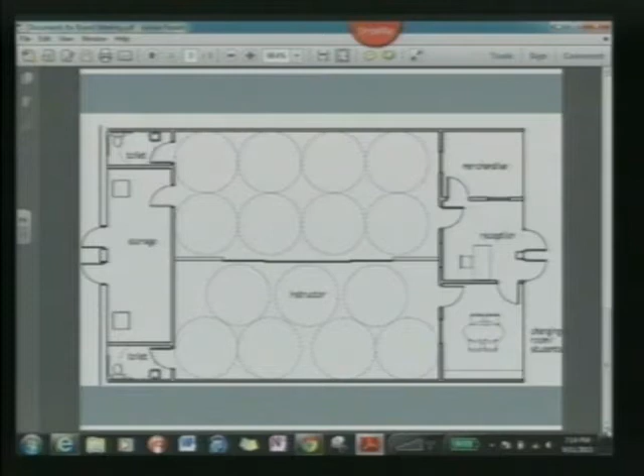We really feel that owning a business comes with a great responsibility to give back to the community. As a result, we're starting our own charity, called Giving Goddess, to support local women and children. We intend to have a once-a-month Giving Goddess open house on a Friday night, and all the proceeds from that will go to a local charity.

Women will be able to come to the studio for 2 hours and bring a friend to attend our specialty fitness classes. We'll then partner with a local business for an informal after event. We're very excited to establish and grow our relationship with other local businesses so we can all support one another. We also plan to join the Chamber of Commerce and participate in local festivals and events. Further, we'll be offering discounts on our classes to college students, teachers, military personnel, nurses, and seniors.

So in closing, we hope we've provided you with some insight into our business plan. We are genuinely, thoroughly excited to open our business in Westmont and would be honored to establish a long-term successful relationship with the village. We'd be happy to answer any questions you may have, and respectfully request your approval of our special use permit.

Okay, thank you very much.

Is there anybody from the public who wishes to comment either for or against this special use? Seeing and hearing no comments, we'll close the public comment.

Staff: This space is a former dance studio, and it should be a unique new addition to the shopping center. It will attract visitors to Westmont for classes and will fill a current vacancy, and we have no other concerns. And the parking is more than adequate? Correct. Thank you very much.

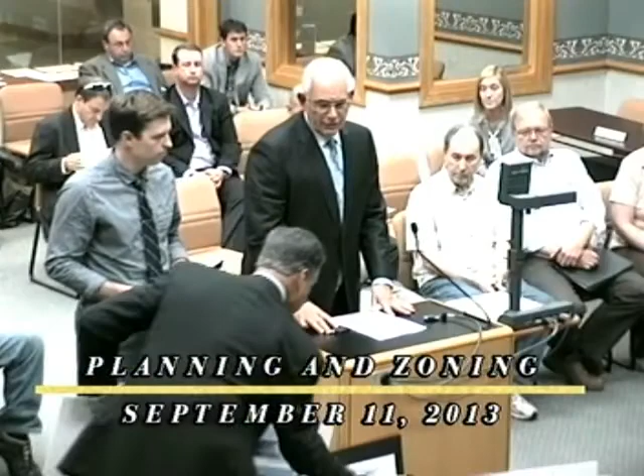Good evening, Mr. Chairman, members of the Planning and Zoning Commission. I'm Steve Pagnotta from the Bradford Companies. I'm going to coordinate our presentation tonight. We have a series of professionals that are going to address a variety of different development issues. Bradford's a 25-year-old company. It's developed about 60 projects, primarily in the Chicagoland marketplace, about 10 million square feet.

And if approved by the village, this would be our 7th Mariano's that we would be developing in Chicago. We've completed 4 Mariano stores in Chicago, first one in Vernon Hills. We opened one in Palatine, Harwood Heights, Illinois, and Frankfort. In addition, we have 2 under construction, one not too far from here in Wheaton and one in Lake Zurich.

So just to give you a feel for the store, we have a representative from Mariano's here tonight, who could also address the concept and what Mariano's is about. But I thought we'd start with our civil engineer to address our preliminary plat as well as the site plan, and then we'll move into landscape architecture, then building architecture, and then probably open it up to questions. Drew?

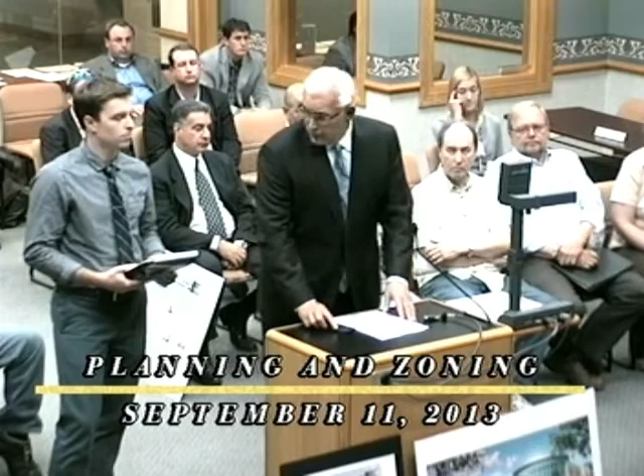Good evening. My name is Drew Walker with Kimley Horn. We're the civil engineering consultant on the project. This is the projector.

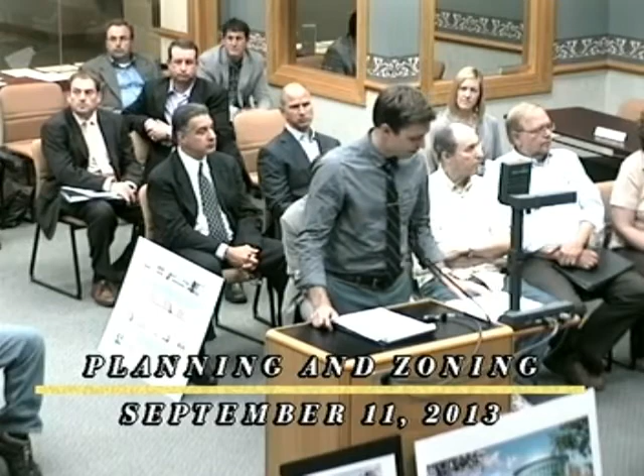Just to start out here, this is the plat of subdivision. I'll show you that the property will be split into 2 lots. You'll have an access easement to serve Lot 2 on the south here. We also have an underground detention easement. It's pretty straightforward. Look on the site plan here.

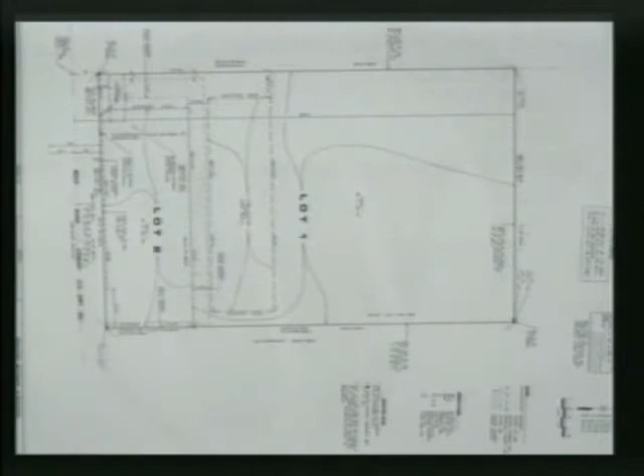Site plan. So we have an approximately 71,000 square foot grocery store on a 9.5 acre site. There's 542 parking spaces. Give you an idea of the site circulation. I have this angled so you can see it. North is in this direction here.

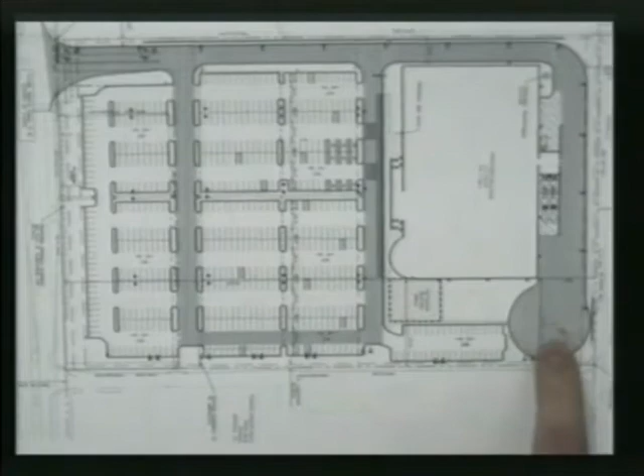So 63rd Street bounds the property on the south. We've got internal circulation. We've tried to separate your truck traffic, which will go behind the store and has a truck turnaround in the rear here, so that it doesn't have to intermingle with the pedestrian and vehicular traffic, located just south of the grocery. 2 main parking fields, and additionally we have pedestrian access all the way to the right-of-way of 63rd Street through a nice landscaped median here.

Moving on to, do you have the grading exhibit? I brought that as well, just to give you guys an idea of what's going on.

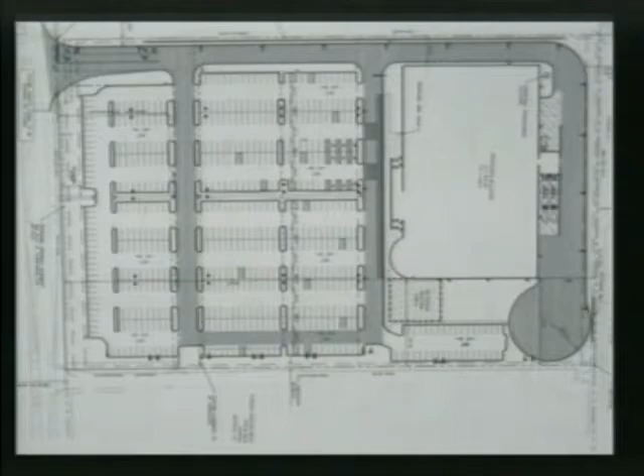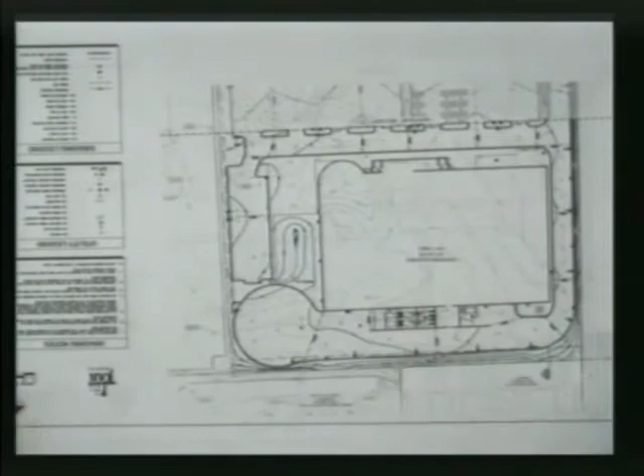Basically, we'll be trying to send as much drainage to bioswales located here at the south of the site and in some landscape areas, before the stormwater makes its way to the bioswale in this area, and then to an underground storage facility that would meet the town's detention requirements.

And then lastly, your utilities. The site is being served by an existing water service along the eastern boundary, and additionally there's the existing sewer service here that would serve the property. Stormwater would be managed through an underground detention facility located under the main parking field here.

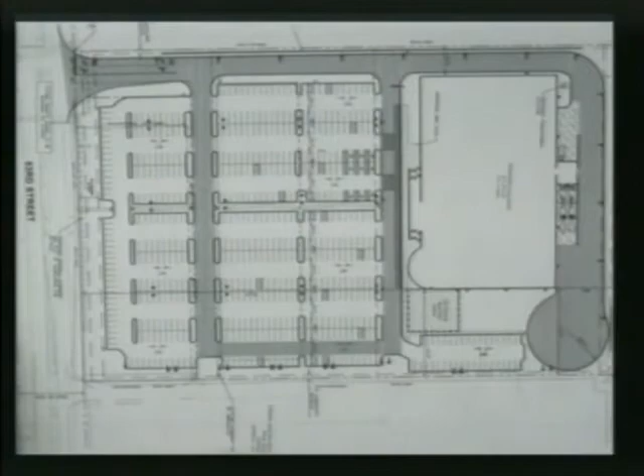Our next presentation is on landscaping. Ellen, do you have the exhibit?

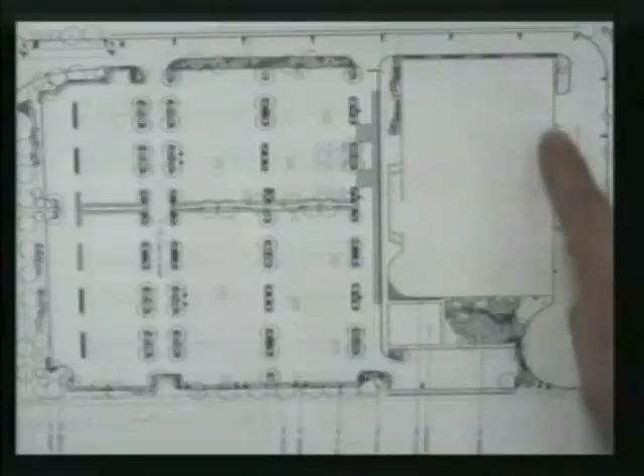Hi, my name is Ellen Schmidt. I'm with the Lakota Group, the landscape architects on this project. We have provided foundation plantings along the facility and the facade as well. Along with foundation plantings, we are meeting the parking lot tree requirements, planting trees within the islands and the interior, as well as providing parking lot screening around the exterior, including the southern side, which will be more heavily screened with a large berm and some evergreen trees. And along the roadway we are providing the required parkway trees.

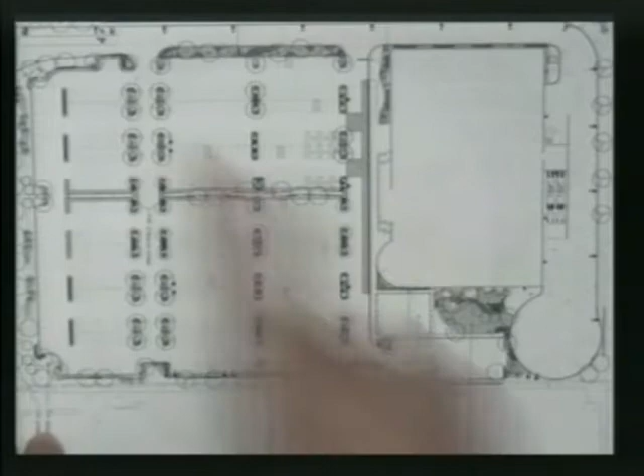As was mentioned in the civil plans, we're providing a bioswale here, which will be planted heavily with native vegetation. The existing site has quite a few trees on it now, which we are planning to remove. Many of them are poor quality, undesirable species, and our plan does meet the tree replacement requirements listed by the village, as well as the general overall open space tree planting requirements.

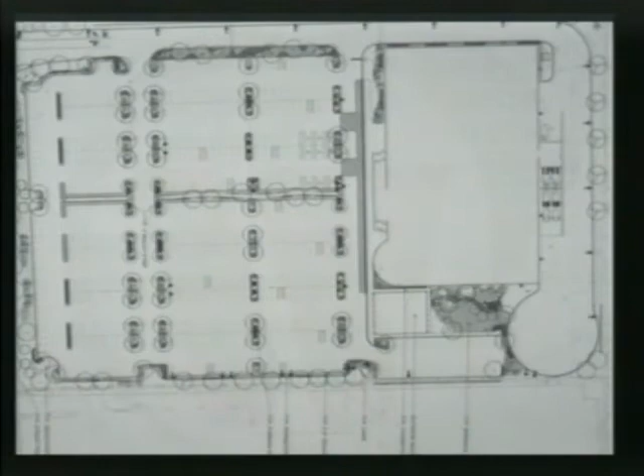Just as a close-up, we have the bioswale here, just east of the grocery store, and an outdoor seating area that is yet to be determined. This will be further developed as we move forward with the project, but it will be a nice amenity coming out of the grocery store here.

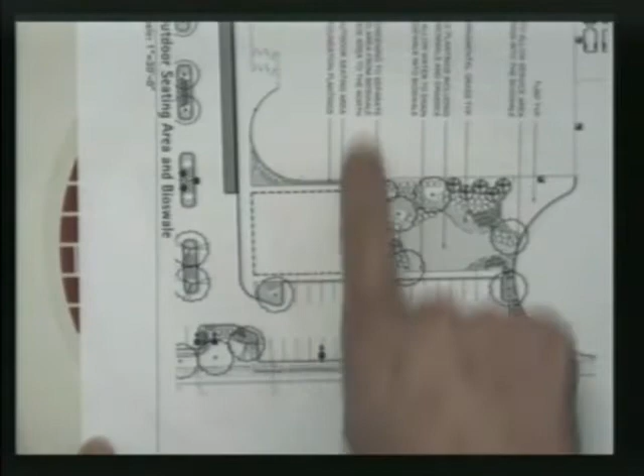Mr. Chairman, would it be appropriate, to the extent you have questions regarding civil engineering or landscaping, to bring it up now before we move on to architecture? I realize we went through some of that pretty quickly. So should we start with civil engineering and move into landscaping questions? I'll query the board members—does anybody feel you need any explanation so far as to what we've seen? No explanation, I do have a question. No, please continue with the presentation.

All right, our next presentation is by Peter Theodore. We're going to address the architecture of the building. Turn it over to you, Peter.

Good evening, my name is Peter Theodore. I'm the architect for the Marianos building. What I'd like to do for the audience is just quickly show them the rendering.

If I may interrupt, we have adequate drawings. Okay, why don't you put those up here so the audience can see them? Perfect. Thank you.

This is a pretty exciting project, exciting from many different vantage points. When you look at this building and compare it to other retail architecture, something becomes apparent immediately. When you consider retail architecture and the use of glass, it's rather limited—most retailers do not give up floor area to glass. Bob Mariano's concept of architecture, glass, and building function all relate.

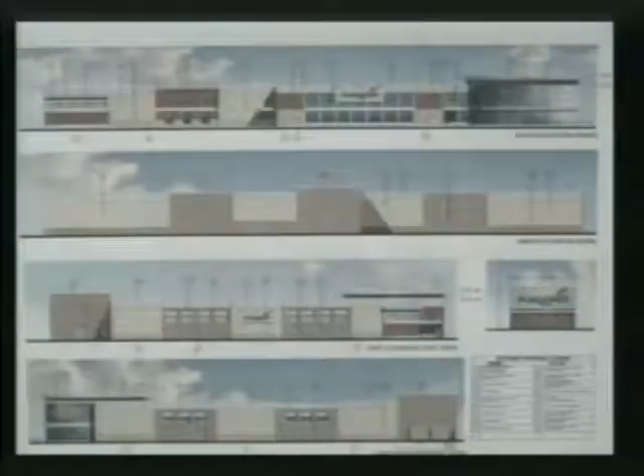So when you look at this architecture and ask yourself, what style is it? How does the building work? Everything you see from the rotunda to the center of the glass is all about the great outdoors coming in, the light and ambience spilling out, welcoming the pedestrians.

The rotunda is an extension of the landscaping, in that it has its own landscaping oasis within the store. You're actually encouraged, unlike other food stores, to sit down and sample the foods—whether it's focaccia bread, gelato, delicatessens. There's a litany of foods surrounding this area where you're encouraged to stay, mingle with friends, and socialize.

And enjoy the atmosphere. When we think of vestibules in a grocery store or any retail store, we think of a transitional space, purely utilitarian, serving a function. That's not Bob's concept. From the minute you enter into the store, the vestibule opens up into the produce aisle, so the vestibule actually becomes part of the store.

So when we look at the glass, virtually the whole front of the store is given up to glass, so that the functions behind those walls become alive and interactive. Real estate is so valuable to retailers that they don't usually give up that area, but to Bob, it's part of the whole function of the store.

So the architecture relates on a one-on-one basis, and as you travel around the building, high windows let light in above the fixtures. There's articulation on all four walls, and it's a complete masonry building. So it's four-sided architecture, everything has a reason, and it's reflective of how the store operates.

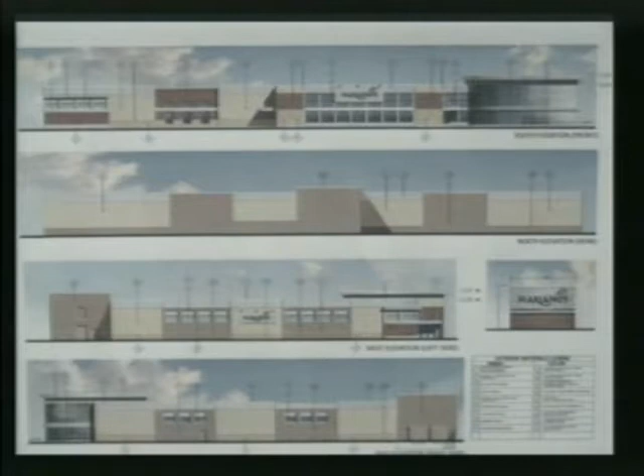With that, I will conclude my presentation, and I'm here to answer questions.

Thank you. Clarification, one thing — you said the signage on the side of the building? On the east elevation, we have it incorrectly shown on the west elevation. That's what I was going to ask you. And it will be on the east elevation. And it shows up correctly on the perspective. All right.

I do have one comment, if I may. On these drawings we've got, the 4 sheets, the engineering drawings — on the back end, we've got a street lighting, parking lot lighting drawing. It looks like your building is turned 90 degrees clockwise, so let me bring up the exhibit.

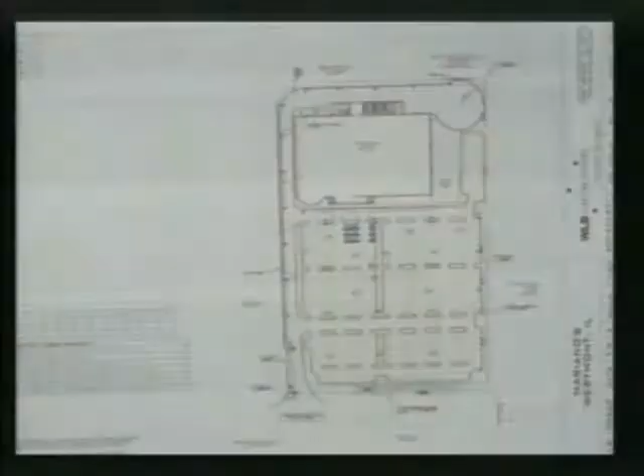North? Is it the same exhibit, Mr. Chairman, or you have something different? That's correct, no, that's the one. Okay, it looks like your glass enclosure is on the southwest corner — I mean, the north. Yeah, the lighting, in terms of where the poles are, is identical, but the building changed. That's an earlier version of the site plan. So the building is as we presented it — just disregard the location of the building in that plan, according to these engineering drawings we have. Yeah, we'll modify that accordingly.

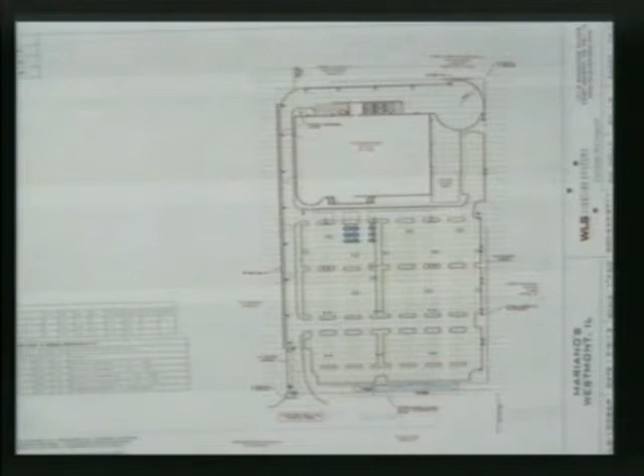Okay, no, just so we're all on the same page. I think we have another — that's the correct orientation of the building as presented. So we'll modify the lighting exhibit for our next presentation. I want you to build it in the right way. We'll try. Okay, please, go ahead.

That concludes the presentation. As I mentioned earlier, we have people available to the extent there are questions regarding the Mariano's operation — there's someone from Mariano's. If there's questions regarding any traffic, we have a consultant there, as well as civil engineering, landscaping, and then representatives from Bradford. So that concludes our presentation.

All right, fine. What I intend to do then is I will open this to the public comment, and as each person brings up their concerns for or against, then you can satisfy their concerns. Okay, will anybody speak on this issue? If so, please come up and announce your name.

Hi, my name's Joe Kumkuski. My father and I have owned and operated Westbrook Market on 10 West 63rd Street for approximately 10 years, about 9.5 years now. You can imagine our concern with the idea of bringing a grocery store directly next to our grocery store.

This has been something that's really seemed to trickle along, and it hasn't been out in the open. We've been asking about it, talking about it, trying to find out any information we could, and we've been told that they're kicking tires, just looking, nothing's really happening yet. Now we're coming to find out more and more that this is being pushed forward close to final stages, and we're very concerned about that.

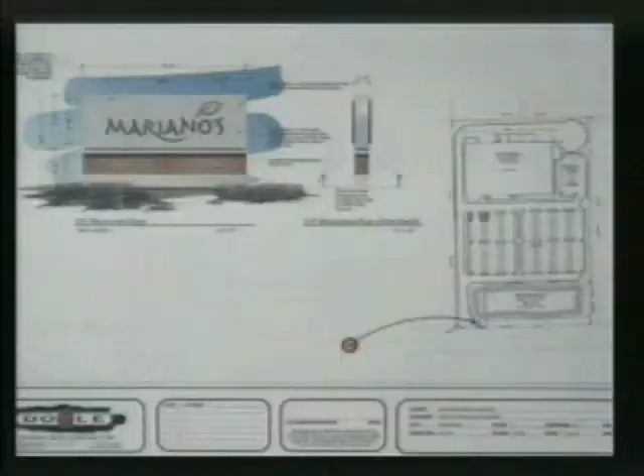Further questions, Commissioner Fidesco? I do want to continue on the signs and the lighting. The monument sign, that does not have the same type of lighting displayed there. Is that going to be some sort of spotlighting from the ground? The monument sign is a low ground type of sign which will be uplit, so again no internal illumination, softly lit with directional lighting on the sign only.

Okay, so that's my question on the sign. My next question is regarding the actual parcel itself. I was on the village board at the time this property was purchased, and at that time there were still wetlands on the parcel. And you're going to mitigate those wetlands - you're not going to replace them. You're going to mitigate that by placing underground storage?

No, the underground storage is regarding detention, separate from the wetlands issue. As it relates to the wetlands, I'll have our civil engineer address it - I believe the fees are being paid in lieu out of bank. Okay.

Good evening, my name's Andy Heinen, I'm with Kimley Horn Associates, civil engineer, working with Drew also. In regards to the wetlands, we are working with DuPage County Economic Development Planning. We've had a pre-application meeting with them several months ago, made our initial submittal, and received positive feedback from DuPage County. There are about 5 comments that we're currently addressing, so we are working with DuPage County. We are going to be impacting the wetlands, and we will be mitigating for them at a 1.5 to 1 ratio.

Andy, can you just address what the purpose of the vault is for stormwater, comparing that to wetlands? Yeah, absolutely. So we are proposing an underground detention system. What that's providing is the required stormwater management for the site based on Village of Westmont and DuPage County stormwater management ordinance. There are also additional depressional areas on site, and we're compensating for that at a 1-to-1 ratio for filling in those depressional areas. So not only are we providing the required detention, we're also providing additional compensatory storage for the depressional areas on site, contained in an underground detention system.

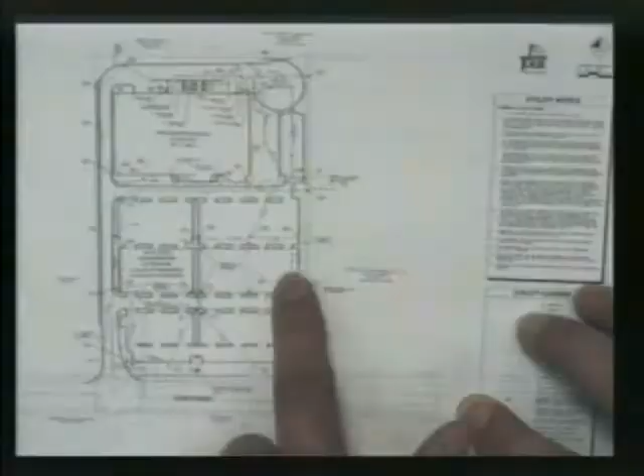So the underground detention system chamber is proposed towards the south end of the site, kind of in the middle, and the site drains essentially from the north to the south to the detention system. There's an outlet structure from the detention system that's conveyed to an existing storm sewer on 63rd Street. That storm sewer is designed and has the capacity to handle the allowable release from the detention system into the existing system.

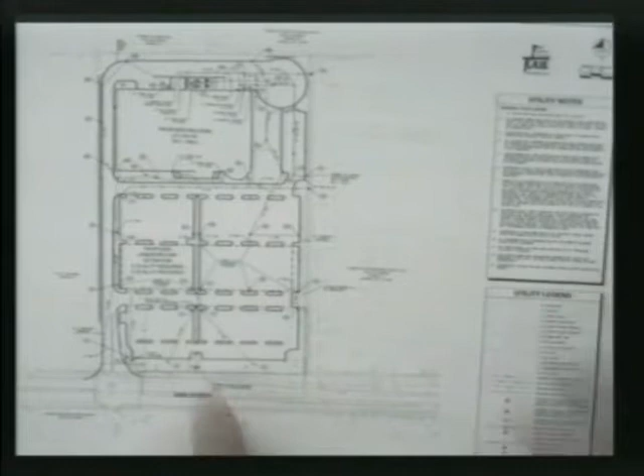As far as the detention system and the parking lot itself, will there ever be an occasion that the parking lot itself will store any water, or is that basin large enough? No, it's a large enough basin. We don't want to provide stormwater management or stormwater detention in the parking lot.

So even in a severe storm, collecting that water, you're not going to have any issues? It'll all go into the underground storage. We're designing for what we call a 100-year rainfall intensity, so that detention system is designed for that event. There's going to be some ponding in the parking lot, but we're limiting that to no more than a foot, meeting ordinance on that.

I just wanted to make one last comment about the store itself. I've been to the one in Elmhurst, and I think this design is much better. That must have been earlier on in the evolution, just a different concept. The majority of the stores are similar to this, but that's a different concept. Different architect.

Commissioner Van Buren: On the parking, it seems to me the size of the parking spaces are substandard by our standards. It would require a waiver from the village board to go to about 9 by 19 rather than 10 by 20, and we'd allow for some overhang into the landscape area.

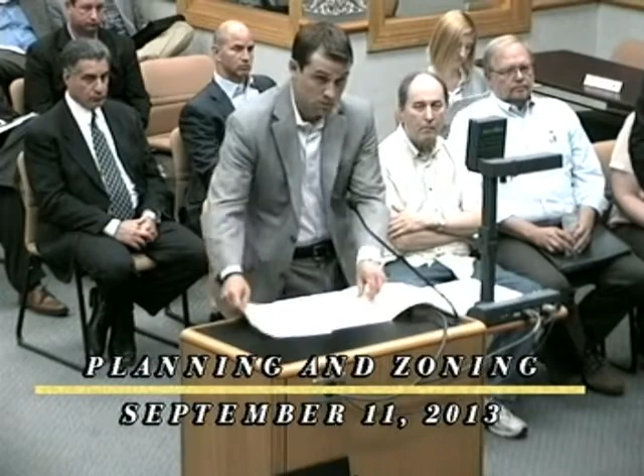As it relates to the perimeter treatment, Bill could address that. I mean, are these prints preliminary then? You're gonna come back and - No, in terms of what's there, we can address it right now. Are you talking about - I see a small fence across that north section, that little area where the truck turnaround is - what's the perimeter treatment?

There's a retaining wall, that dark line? So is it the retaining wall and grade landscaping that's lower at that point? It is. So the truck lights wouldn't shine past that retaining wall? I'm not sure.

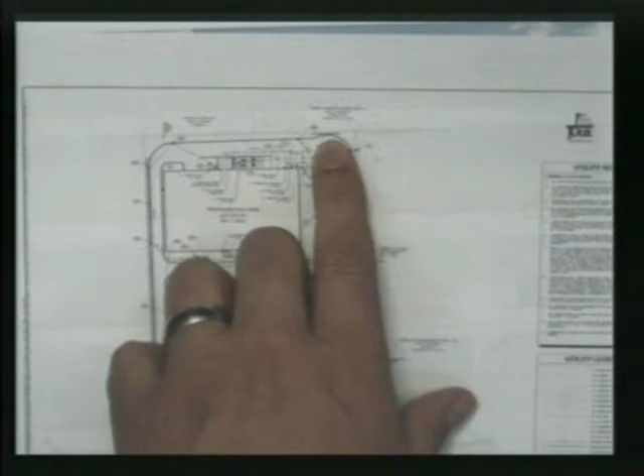I think to the east it doesn't matter, there's a building, obviously a UPS. As Bill mentioned, this is a small retaining wall, about 2 feet in height. The existing grade of the self-storage facility to the north of us is quite a bit lower, about 5 or 6 feet lower than our proposed grade. Then there's some condos or residential on the other side, north of that storage facility. Directly north is the storage facility, that's all industrial.

How about idling, when you have deliveries, what will your times be for deliveries? The representative from Roundy's will address that.

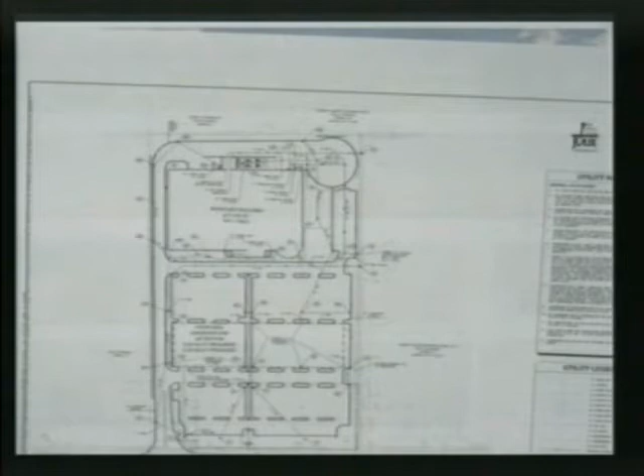My name is Max Dickman with Roundy's Supermarkets, the parent of Mariano's, 875 East Wisconsin Avenue in Milwaukee. The question regarding deliveries is, generally our deliveries come early in the morning, especially in an area like this where there's not residential nearby. Our goal is to be in by 5 and out by 7 with our semi-trucks, keeping them out of traffic. With regard to direct service deliveries we don't control, like bread truck and soda, those usually arrive between 7 and noon on a fairly regular basis. But if there were municipal ordinances, we could comply, though given the lack of residential, early morning seems the best fit.

I have a question about where's the nearest Roundy's warehouse you'll be getting deliveries from. We have 2 that are closest, the closest one is in Kenosha, Wisconsin, that's our commissary, where we prepare a lot of our foods, ice cream, things like that. But our distribution warehouse is in Oconomowoc, Wisconsin, so they are coming a bit of a distance, Oconomowoc being between Milwaukee and Madison.

So then I assume you wouldn't have regular trucks coming in, sitting in the parking lot in front idling? No, even if it's our trucks or anyone's trucks, we have a no idling policy. Any trucks that come to drop off at the facility are not allowed to sit and idle, they have to turn their trucks off. Okay, thank you very much. You're welcome.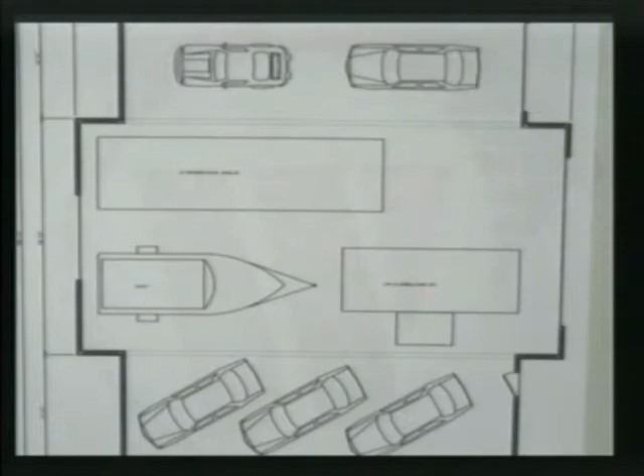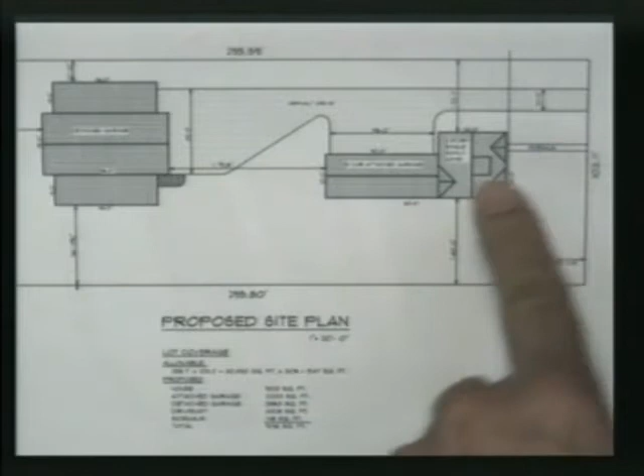This is a proposed site plan showing the home with its attached garage and the detached garage. The detached garage will be approximately 200 feet back from Warwick Avenue, and about 80 feet back from the rear of the house.

To the north, on this side, there'll be 10 feet to the side property line. Right now, there's currently a very dense line of evergreens that will shield that side of the structure from the adjacent townhouses.

There'll be approximately 54 feet from the rear of the proposed accessory building to the rear property line, and approximately 37 feet to the south property line. The driveway will be minimized in the front of the property with a 10-foot wide drive, and will not widen out to the wider drives that we're requesting until behind the house.

With a lot size of 30,490 square feet, the allowable lot coverage of 30% is 9,147 square feet. The proposed home, attached and detached garages, all driveways and walkways will come in below the allowable at 9,136 square feet.

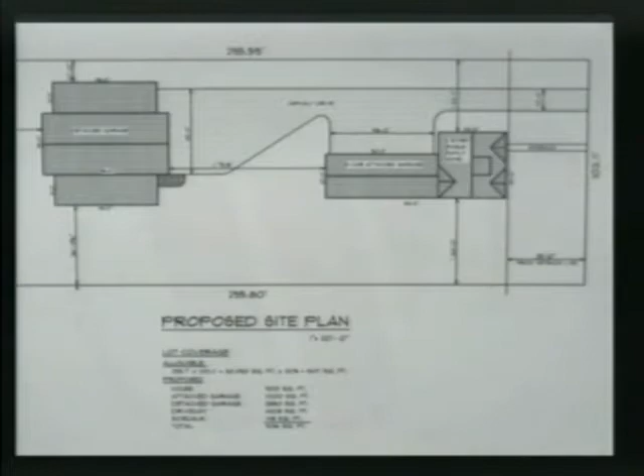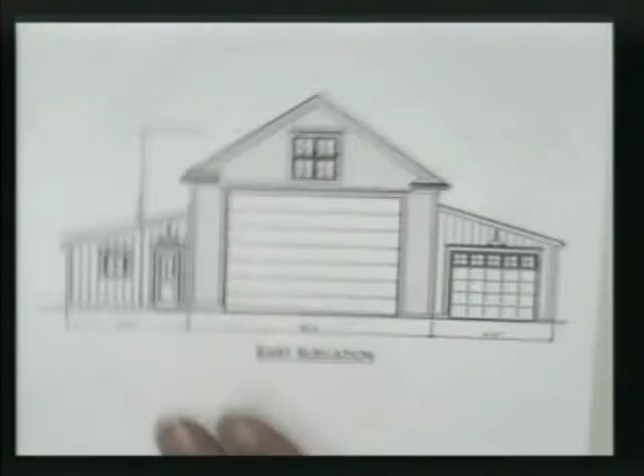This is the proposed front elevation, the large overhead door for the RV and the boat, a smaller door to the side for cars, same basic proportions as the picture that I previously had up here.

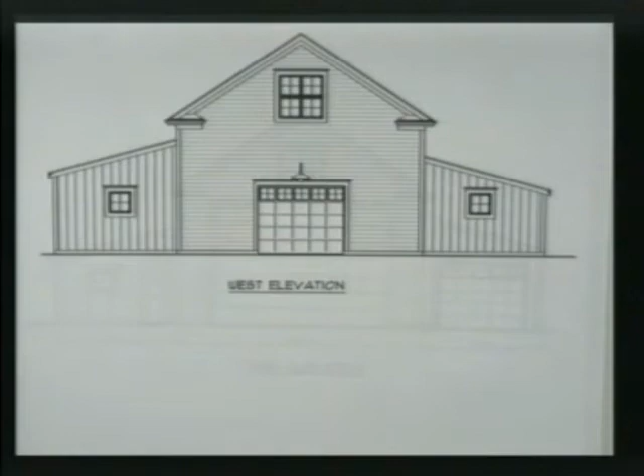This is the rear elevation, again similar in proportions to the front. Just one small door on the rear center of the building for things like lawn tractors and so forth. And then lastly, these are the side elevations.

Again, pretty much both the same, the south and north elevations. By varying the roof heights, the materials, putting lots of windows on it, by setting back the side wings on the building, it all serves to break down the mass because it is such a large structure.

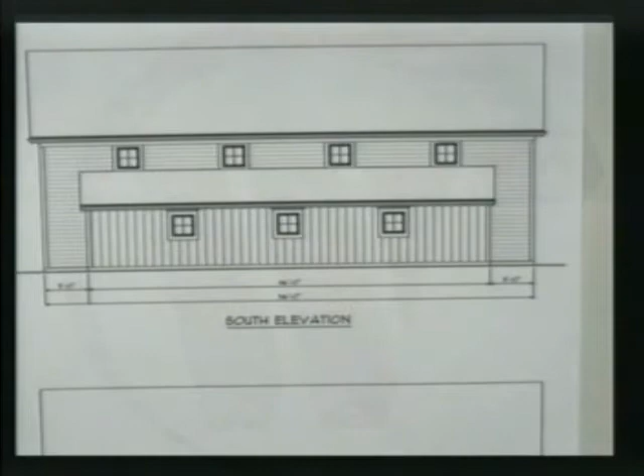Mr. and Mrs. Benfield have been looking for a property where an accessory building like this might be appropriate. Although you recently rezoned this property R3, the fact is it's still very much a transitional area.

Given its proximity to the large office building 3 lots away, the 32-unit apartment building 2 lots away, the multifamily property just behind it, the ComEd facility and the townhouses to the north, the value of this property has been severely diminished. Our proposal maintains the single-family nature of the street and yet addresses the diverse nature of the existing surrounding properties.

I'd like to address the concerns that the staff had raised in their report. Mr. Benfield has no intentions of parking additional vehicles outside of the garage. That is his reason for asking for the structure the size that he is. He's very concerned about the appearance of the property and believes that all vehicles should be out of sight.

I believe there are ordinances in place that would prevent a future owner from running businesses out of the garage or generating excessive noise.

With all the second point that was brought up by the staff, with all the driveway areas, we do not see the need for a patio or a deck, and certainly with all the garage, a shed would not be needed. That being said, if the commission thinks some amount of area should be set aside for future expansion, we can modify the plan slightly to accommodate that.

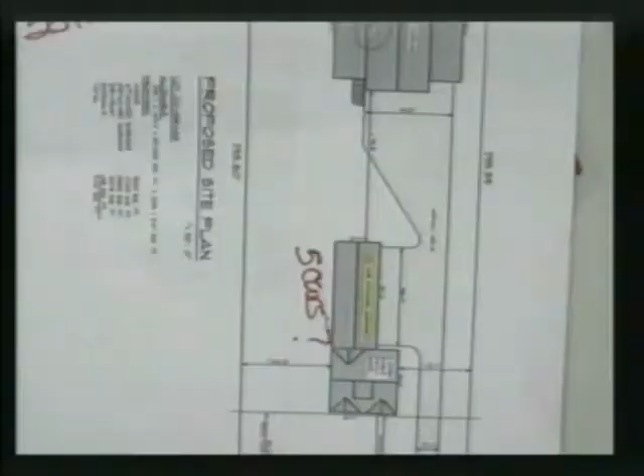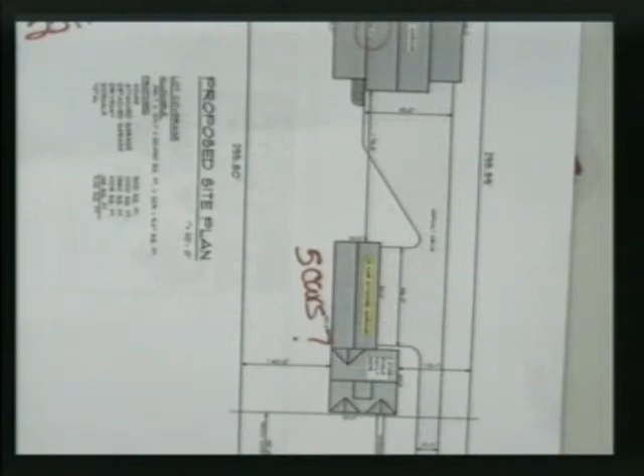garage in the back. I'm alarmed by the 5-car garage that's attached to the back of the house. And I think that the reason why that's going to be able to be done is because of the width variance for the driveway. Take away that width variance, and I don't think you're going to be able to put 5 cars worth in a garage. So we're talking 10 cars, an RV, a boat, and a van. That sounds like a storage facility to me. I'm sorry. As was brought up, we are trying to sell our property.

Unbeknownst to me, the lady who is here, who just happened to poke her head in from Arlington Heights, is one of the people interested in our property. She's here to watch what happens in this village as far as how we treat situations like this.

I honestly believe if this goes through, I will not have someone to sell my house to. I'm terrified. Yes, we have an apartment building. Yes, we have Commonwealth Edison. And yes, on the next block, there is horrible, horrible flooding.

So what can you tell me? How is this not going to hurt property values? And forget the values, how am I ever going to sell it? Someone's got to buy our house. We have to retire. So that is what I wanted to bring up.

Oh, and the other thing too, I think the architect spoke to it, but I didn't quite understand. Most homes today have a patio or a deck. If not now, somebody's going to come before you for a variance because they're going to want a patio or deck. I don't think they're going to want their cookouts on a driveway. So we're going to be looking at more impervious areas. I have to say, it looks more and more like this is gearing up for a storage facility than a single-family home. That's all I have to say.

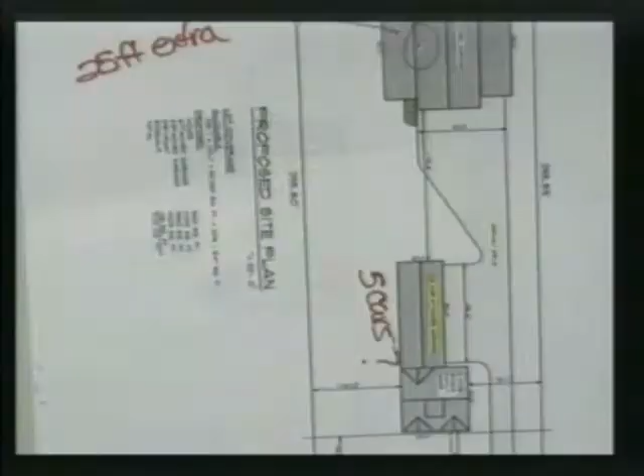Since we're on the subject of the 5-car garage, I was just wondering, because that's going to be a lot of wall there for us to stare at. I mean, we're staring at a lot of wall right now with a 32-unit apartment building.

Yeah, no one other than the staff saw the original drawings for this detached garage, and we've changed that dramatically to try to soften everything, to break up the size of it. As I said in my opening statement, we'll do landscaping, anything we need to do to soften those surfaces. I would not put a 50-foot-long blank wall facing your house. That doesn't do anything for my reputation as a designer.

On the other hand, we're not going to completely design a building if we can't get approval to build it. So I tried to produce enough information here.

I need you to convince the lady sitting right there, because she's representative of us trying to sell our home. She just happened to show up. I hate to say this, but we're getting off the subject.

I guess what I'm looking at is our property values. Seeking a variance, you're supposed to do no harm to the area. I don't know that I will not be harmed, or that we will not be harmed. Duly noted, thank you very much.

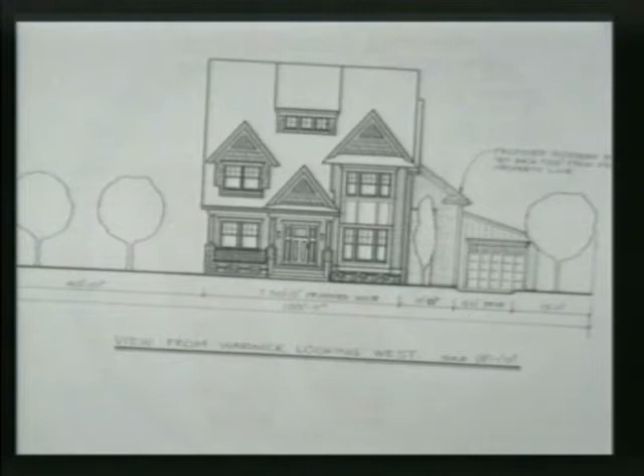And just to comment on the previous commissioner, we are below the required 30%, which is already reduced because of the flooding issue. And then on top of that, to do dry wells, possibly 2 areas, plus natural plantings, plus permeable pavers. I mean, bending over backwards to help with the flooding issues. I certainly understand the neighbors, but we would do everything within our power to help the situation rather than compound it.

I know everybody says that this is such a large structure, but as the gentleman just pointed out, if this was all attached together, I don't think they would be in front of us today.

Because as an attached structure, and John, you can correct me if I'm wrong, I don't believe that there would be any questions on a variance for that. And allowing for the flare of the driveway and stuff, unless there was some odd way that was set up, they wouldn't even be here. So they could bring that barn all the way up and run it into the other 5 cars and have it still as one structure, and it could go then.

Yeah, I would say in most respects that is a flaw in the zoning ordinance that would allow that, except to the extent that this was viewed as an attached storage facility and not truly in character with a single-family home. Single-family homes are allowed, garages are allowed. Something of this size, I think staff would have to look at if it were attached or detached, whether it's an appropriate use. Because I guess one of the things I struggle with is what is the rights of a property owner?

So we've heard from everybody who's a neighbor, and I respect that you guys don't want to have a bigger mess and more flooding. I understand that. You've got somebody who owns this. We've seen other proposals for this property that called for a lot more coverage, and I don't think you would have had as personal a representation as in this case, where the gentleman will be owner occupying, and at least here on TV, sounds like he wants to be a good neighbor.